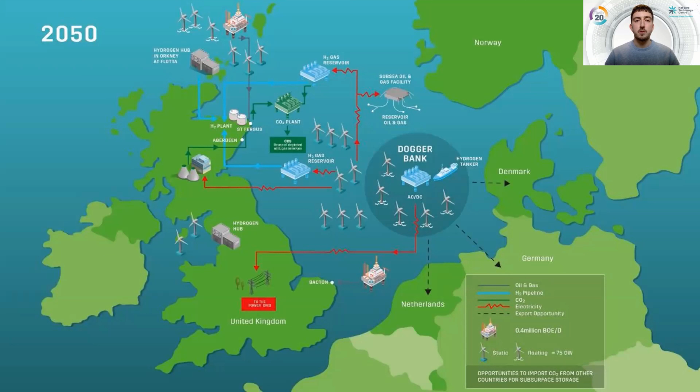The integrated energy vision considered 3 potential scenarios for the UK offshore energy system in 2050. These were termed emerging, progressive, and transformational. For this study, I've considered 2 of these scenarios, those within which green hydrogen production is predicted to play a major role in the UK energy system.

In the progressive scenario, 75 terawatt hours of green hydrogen is forecast, which represents around 5% of the total energy mix. This is supported by increased offshore wind deployment beyond the targets set by the Committee on Climate Change in 2019, and a good proportion of this deployment would be required to be floating to meet this deployment forecast.

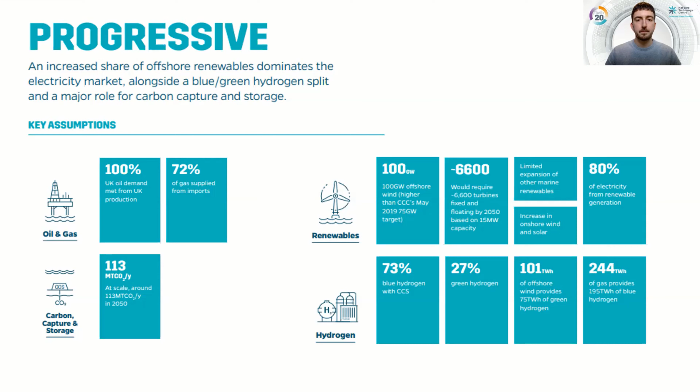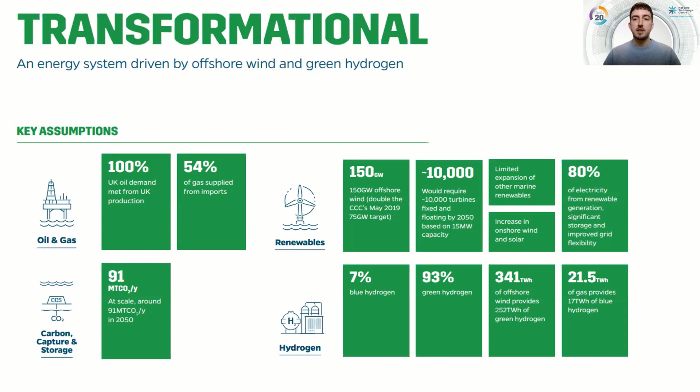In the transformational scenario, green hydrogen plays an even bigger role. 252 terawatt hours of green hydrogen is forecast, representing around 16% of the total energy mix. This requires even more offshore wind deployment, double the target set by the Committee on Climate Change in 2019, of which at least half would be required to be floating.

In terms of the scope of this study, consideration is given only to UK-based floating offshore wind-powered green hydrogen. And to ensure that production is 100% green, I've made an assumption that power is coming only from a dedicated floating offshore wind facility with no backup supply from the grid. Our modelling also only considers upstream production costs and not other costs associated with midstream and downstream delivery.

We've considered 3 separate pricing scenarios. The first with equipment costed at present day prices, and we've then applied 2 cost reduction profiles. The first profile reduces the cost of the floating offshore wind to a comparable levelised cost of electricity with current contracts for difference strike prices for fixed bottom offshore wind. This is currently around £40 per megawatt hour in 2012 prices.

The second reduces the cost of the green hydrogen production equipment, such that the levelised cost of the green hydrogen is equivalent to UK government projections for 2050. These were released alongside the government's white paper for hydrogen and is around £70 per megawatt hour for green hydrogen production from a dedicated offshore renewable source.

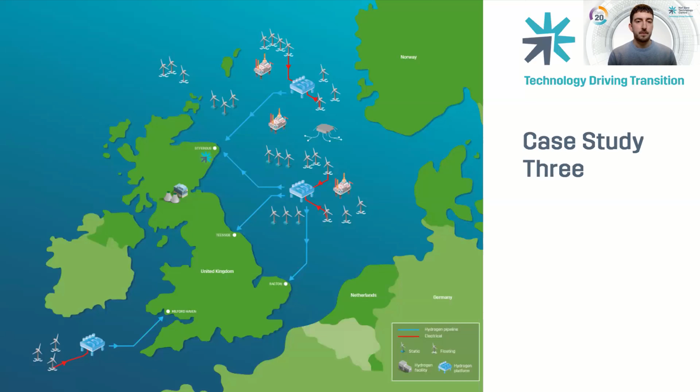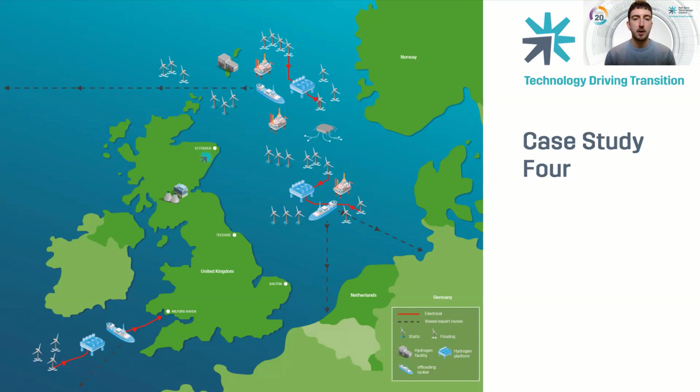For each case study and pricing scenario, models to calculate both levelised cost of electricity and levelised cost of hydrogen have been developed. From the levelised cost of hydrogen models, spending breakdowns are output, providing the levels of spend on each system component for viable projects. These spending breakdowns are used to calculate numbers of jobs created in each spending area, using the same methodology as that in the Integrated Energy Vision project completed by the Technology Centre and the Offshore Renewable Energy Catapult.

Calculated job numbers are combined with an assessment of local supply chain job retention in each region and the UK national supply chain for both floating offshore wind and green hydrogen production. The assessment applies multipliers to the numbers of jobs created by project spend to estimate the numbers of jobs that could be expected to be retained within the UK supply chain on a floating offshore wind-powered green hydrogen project.

I'll now move on to the key findings from the study and provide an overview of each.

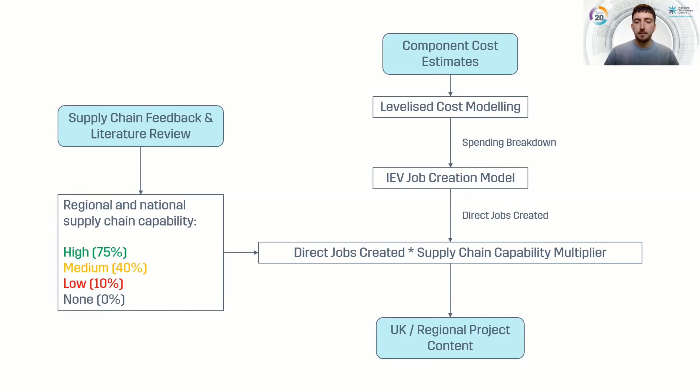Based on the progressive and transformational scenarios of 75 and 252 terawatt hours of green hydrogen production respectively, meeting these scenarios would require 9 and 31 gigawatts of floating wind capacity producing green hydrogen in 2050, respectively. This assumes 50% of the electricity requirements for green hydrogen production in the UK are met by floating offshore wind, reflecting an increase in floating offshore wind in the UK's energy mix as nearshore fixed bottom opportunities become fully utilised.

Average present value life cycle spending on one of our gigawatt scale case study projects considered herein is circa £5.5 billion. Thus, total life cycle spending across the number of projects required is between 49 and 170 billion pounds, depending on the deployment scenario to be met.

To meet the UK government's 60% local target therefore represents an opportunity of up to 68 billion pounds for the UK supply chain in the case of the transformational scenario.

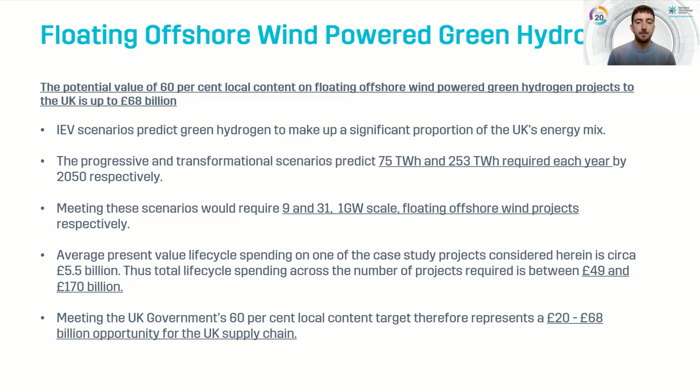Reducing the levelized cost of electricity to £40 per megawatt hour, in parity with current strike prices for fixed bottom offshore wind, can reduce the associated hydrogen cost by almost 60%. This level of cost reduction would require a 51% reduction in offshore wind costs and associated improvement in electrical losses, raising net capacity factors.

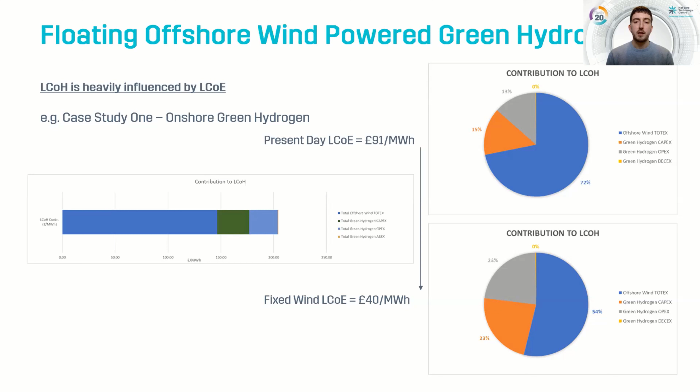Even after reductions of this level, electricity is still responsible for over half of the cost of hydrogen, as shown in the figure on the bottom right. Electricity costs may need to fall further still, below the current strike price of fixed bottom offshore wind, to make floating offshore wind powered green hydrogen projects viable.

So significant cost reductions and technological improvements are required to make green hydrogen production from floating offshore wind viable. Modelling of hydrogen costs at present day prices estimates green hydrogen produced from floating offshore wind to cost between £6.81 and £8.63 per kilogram. To provide a comparison, this represents a significant uplift on UK government projected costs of green hydrogen from all offshore wind, including cheaper fixed bottom offshore wind, for 2025 of between £3.64 and £3.87 per kilogram.

Cost modelling is repeated, with cost reduction profiles applied across all areas of spending to reduce both electrical and hydrogen costs to £40 per megawatt hour and £70 per megawatt hour respectively. This requires cost reductions of 51% for floating offshore wind and between 52 and 72% for green hydrogen production, depending on the complexity of the project considered.

Reductions of this scale represent a significant challenge to UK industry and indicate that substantial investment in finding new disruptive technologies is required. However, this is a challenge that the UK supply chain has risen to before.

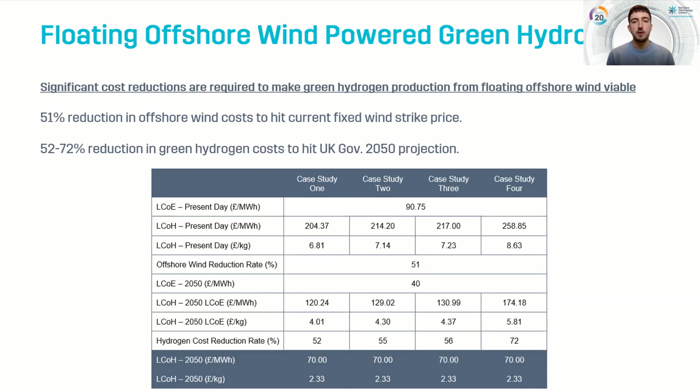Comparing the predicted cost reductions required with the profile of reductions in contracts for difference awards in fixed bottom offshore wind developments to date, we can see that the reduction rates required are similar.

Reduction rate predictions modelled here for floating offshore wind are based on Offshore Renewable Energy Catapult projections for various innovation and deployment scenarios. It's worth noting that these were released prior to the ScotWind Awards and were based on between 8 and 16 gigawatts of floating wind deployment. ScotWind Awards alone amount to just under 15 gigawatts of floating wind deployment.

Reduction rates for green hydrogen are based on the modelled scenarios in our study, with levelised costs rated to 2012 prices for comparison with the contracts for difference award prices.

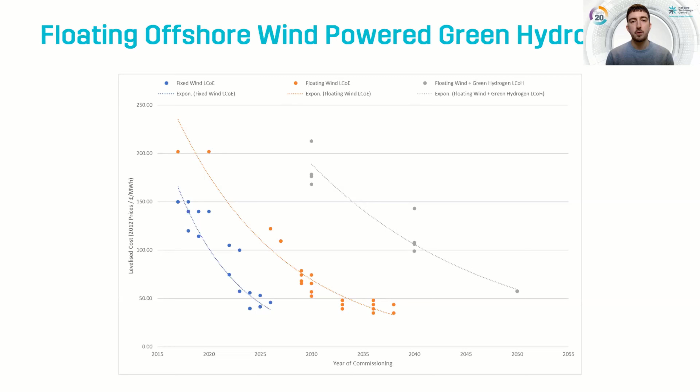Our final finding is that the UK supply chain will require investment in high spend areas to meet 60% local content targets. The UK would fail to meet the government's target of 60% UK content in the sample floating offshore wind projects considered in our study without investment in the supply chain.

However, public discourse around job creation tends to be focused on capital spend and manufacturing of critical components. To reach 60% UK content, a high level of operations and maintenance jobs will need to be secured locally, and steps taken to improve UK supply chain competitiveness in CAPEX areas with high proportions of jobs retained within the UK supply chain.

The highest proportion of floating offshore wind CAPEX is created by spending on the wind turbine. This is an area currently dominated by incumbent OEMs whose operations are based mainly overseas. Increasing levels of jobs created in this area in the UK will therefore require making the UK an attractive location for these OEMs to create manufacturing bases, or investing in disruptive technologies from UK SMEs to provide alternative, cost-competitive solutions.

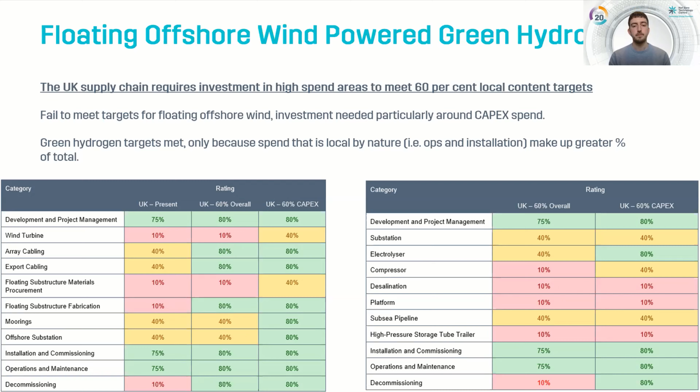And on that, to close, I'd like to thank our Energy Transition Alliance partners, the Offshore Renewable Energy Catapult, for their support in developing the supply chain job modelling calculations. I'd like to thank Xodus for providing the basis of our levelised cost modelling, and my colleagues at Wood for their assistance in developing the case studies considered. And finally, thank you all once again for taking the time to sign into the call today. I look forward to your questions.